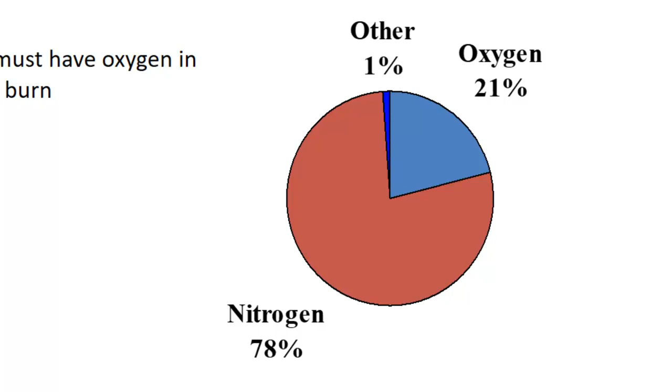First thing you need to know about burning fuel inside an engine is you need a lot of air to go with the fuel. It's really the oxygen we're after, and since oxygen only makes up about 21% of the air, we need a lot of air to go with the fuel we're trying to burn. The ideal amount of air for the fuel is 15 parts air to 1 part fuel, by weight. Air is a lot lighter than fuel, so you need a lot more air than fuel. That ratio of 15 to 1 is what we call the stoichiometric ratio.

If you have thoroughly atomized fuel and burn it at 15 to 1, then every single fuel molecule gets burned and every single oxygen molecule gets burned. In other words, it's totally efficient.

That's not where we get our best power, though. Our best power is a little bit richer than that. Not all the fuel is being burned. That ratio is 12 to 1, 12 parts air to 1 part fuel, so a little bit less air going with the fuel. And that unburned fuel can carry away a little bit of the heat for us.

The leanest we can burn the fuel in the engine is about 18 to 1. The very richest we can burn it is 8 to 1. If you try to burn it any leaner than 18 to 1 or any richer than 8 to 1, the flame gets too cold and goes out, and the engine quits.

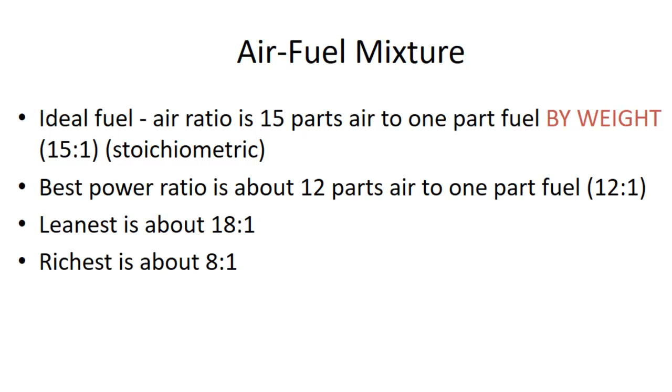So how much air is that? You really don't need to know this as a pilot, but just out of general interest: one gallon of AvGas weighs 6 pounds. A cubic foot of air weighs 0.07651 pounds, which is very, very light. So if we want to burn it at best power, 12 to 1, we have to consume almost 1,000 cubic feet of air with each gallon of fuel we burn. For a Cessna 152, for instance, that's 6,000 cubic feet per hour, or about 100 cubic feet for every minute the engine is running.

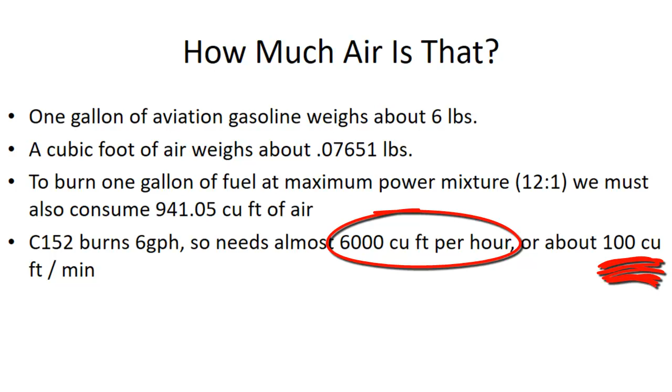Now, we don't know how much air is coming in. There's no real handy way to measure that for us. But we can get an idea of what the mixture is doing by measuring the temperature of the exhaust gases as they come out of the engine, with an exhaust gas temperature gauge, EGT. There's a probe that goes into the exhaust pipe and measures the temperature of the gases coming out. They're typically read out in hundreds of degrees Fahrenheit, and each of the little divisions is 25 degrees.

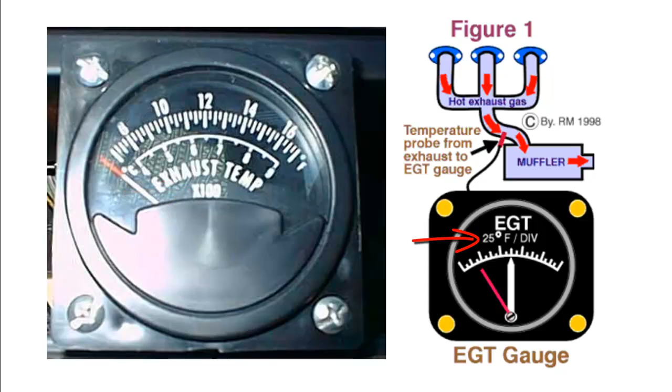Here I've got a chart that shows the relationship between exhaust gas temperature and mixture, where mixture is lean towards the right side of the graph and rich towards the left side. And I made a little cartoon EGT gauge so I can show you how to use one.

So here's about where full rich is going to be. We've gotten up there, we've leveled off in our cruise, and we want to lean the mixture out for cruise. We would only do this for airplanes. For helicopters, we don't touch the mixture control—it's just too dangerous. We'll talk about that a little bit in class.

So we're up there to cruise. We want to start leaning it out, and as we do, we see the exhaust gas temperature come up. We continue to lean until the exhaust gas temperature drops a little bit again, and then we go back to where it was highest. There's a little knob we can turn to set the skinny needle right there at the peak EGT—that's a placeholder so we know where peak is.

Then we can adjust the mixture either to the rich or to the lean side, and either way we go, the temperature is going to drop. What you'll find if you read your pilot operating handbook carefully is that the manufacturer recommends you go 25 degrees or more on the lean side of peak. Most operators, however, have found they get more life out of their engines if they go to the rich side of peak.

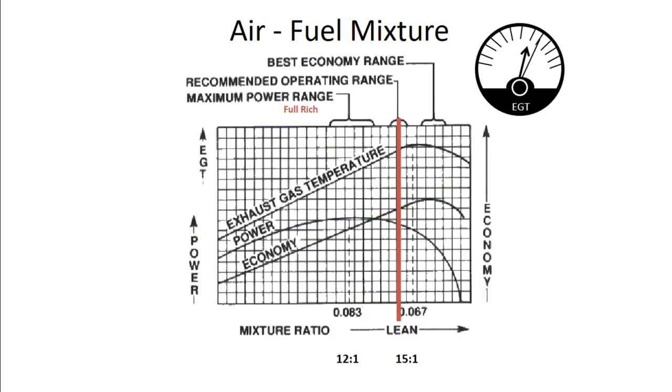Specific fuel consumption is a way of measuring the efficiency of the engine, and it is represented in the number of pounds that you have to burn in order to get each horsepower that you produce per hour. For our engine in the 152, you're looking at about half a pound per hour for each horsepower you produce. So it really doesn't vary much from one power setting to another. But since you're producing more horsepower at a higher power setting, you multiply 0.5 times a bigger number of horsepower and you get a bigger fuel consumption.

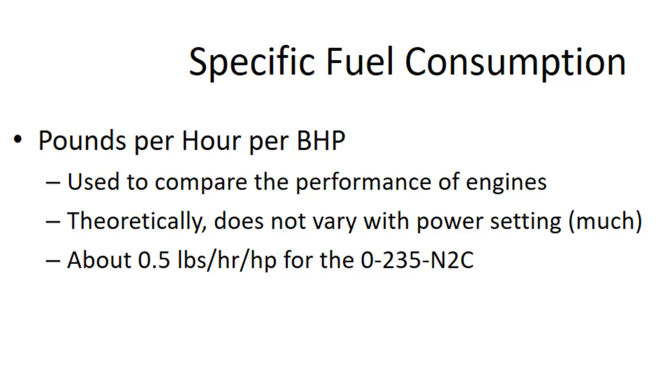Most aviation reciprocating engines are right about a half a pound per hour per horsepower. I believe that's the case for all of the engines we're using, within a tenth of a pound per hour in most cases. The only ones more efficient are diesels, and if you water cool an engine so you can run it harder, that gives you a little more efficiency. You can get the efficiency to about 0.4 pounds per hour per horsepower that way.

AvGas has a number of requirements. The first and most important is that it is approved, either in the pilot operating handbook, meaning it's listed in the type certificate and data sheets as approved for the aircraft, or you have to have a supplemental type certificate that allows you to run a different type of fuel. For instance, a lot of general aviation aircraft have a supplemental type certificate that allows them to run unleaded automotive fuel. But you have to have it approved. That's all the FAA cares about, because their view is the only way it can get approved is if it's tested thoroughly. You could have the best racing fuel ever designed, but it can't go in the airplane or helicopter unless it is approved by the FAA.

It also has to have a low freezing point. We don't want to get up to altitude where it's really cold and have it freeze up in our tanks. It also needs a high boiling point, because the pressure is very low at higher altitudes, and that lowers the boiling point, so the fuel could burst into a boil in the lines going up into the engine compartment. We call that vapor lock. So we need something resistant to that.

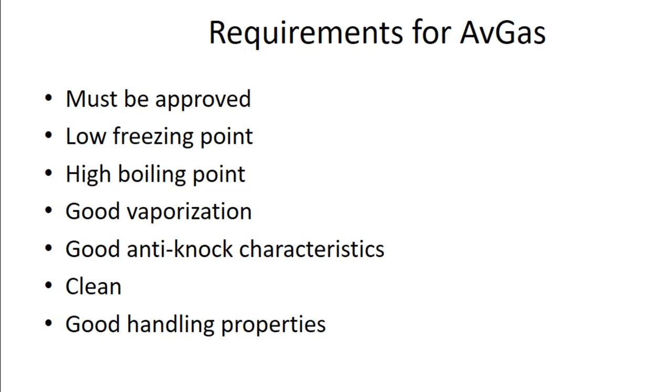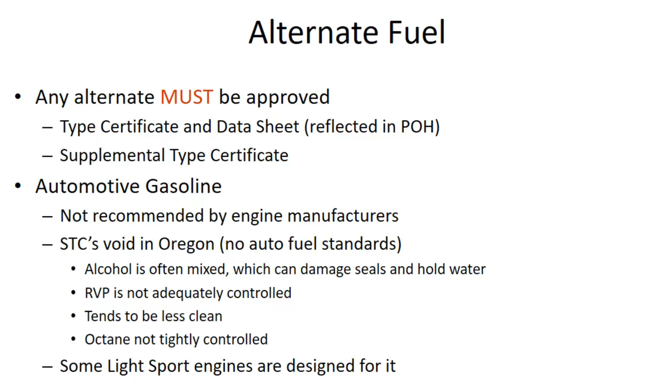Now, alternative fuels again still have to be approved, so you need a supplemental type certificate for that. On the issue of automotive gasoline, I have had some bad experiences, which I'll talk about in class with you. You need to be aware that the supplemental type certificates require certain standards that have to be met, and not all autogas meets those standards. Oregon has no regulations that govern the quality of automotive fuel here, so if you're going to use it, you have to be very careful where it came from and get the fuel jobber to verify that it conforms to the supplemental type certificate's standards. It's an ASTM standard that they have to conform to.

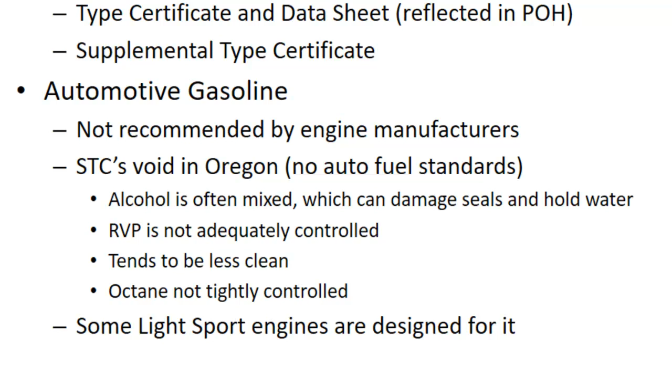There are some light sport engines that are designed for unleaded automotive fuel, and so if it's listed in the Pilot Operating Handbook as being approved, then you can do it.

A word about vapor pressure. This is an important and often overlooked characteristic of the fuel, and it's measured in something we call Reid vapor pressure, which indicates the amount of atmospheric pressure needed in order to hold the fuel in a liquid state.

If the vapor pressure is too low, that means you have to have very low pressure in order to vaporize it, and then it won't vaporize properly, and you'll end up with big clumps of fuel going up into the engine, and that doesn't burn very well.

If the RVP is too high, then it bursts into vapor too easily, and you could have it do that in a fuel line as it goes into the engine compartment, and then you get vapor lock. That bubble of vaporized fuel blocks any more fuel from going to the engine, and you starve your engine of fuel.

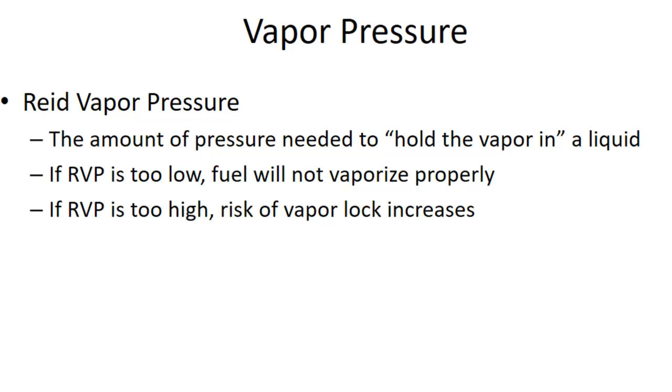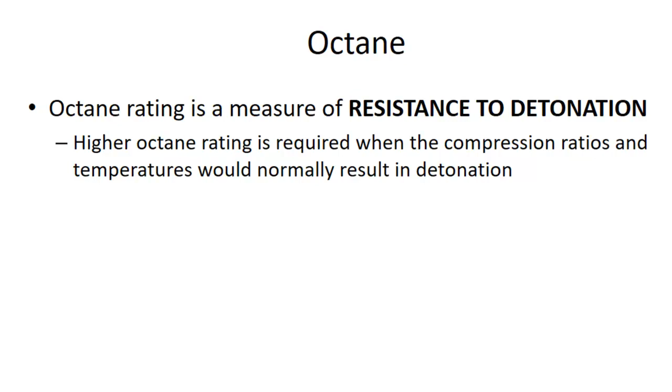Octane is a measure of the resistance to detonation for the fuel. So how much temperature and pressure can we put it under without it detonating?

If you don't have a detonation problem, then higher octane fuel really doesn't do anything for you. So if you've got a car that runs fine on regular, there's really nothing to be gained by putting premium in it. On the other hand, if you have a car and you hear it knock from time to time, getting some pinging, then a higher octane fuel will oftentimes solve that problem.

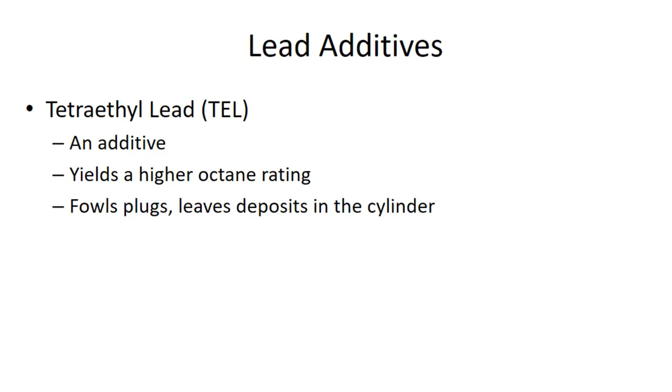The way we get high octane in aviation gasoline is with lead additives. In particular, it's tetraethyl lead, the chemical we use. It's a liquid additive that gets put into the fuel, and it yields a higher anti-knock rating, a higher octane rating. It also fouls spark plugs and shorts them out, making the engine not run smooth, leaves deposits in the cylinder that can cause pre-detonation, and it also poisons the earth. There's really nothing good about it except that it gives us a higher octane rating.

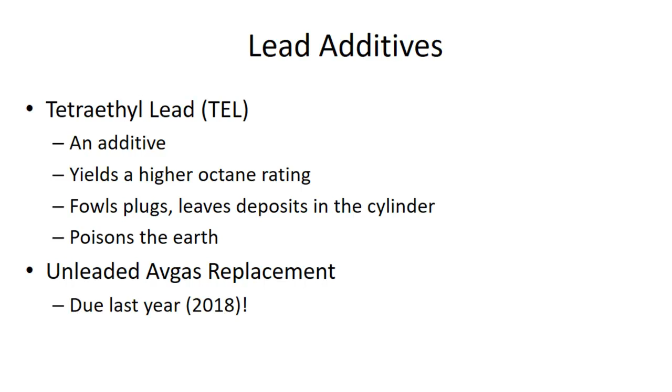Unleaded AvGas is supposed to be coming here, and in fact it's supposed to be here already. It was due last year. However, there were some issues, in quotes. We don't know what those issues are, but the FAA did a bunch of testing on the unleaded AvGas replacements, and there were some issues that needed to be ironed out with them. It'll be interesting to see how long that takes.

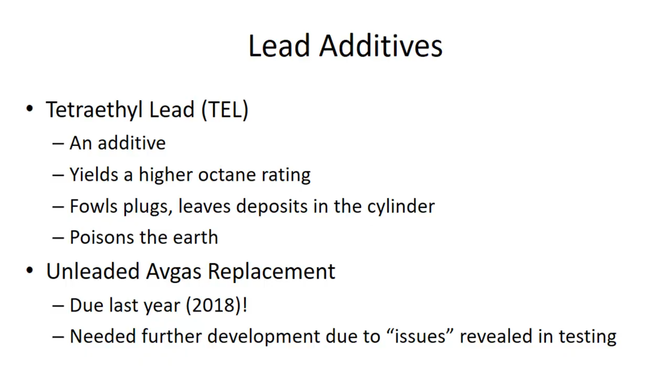Now, AvGas has historically come in about 4 flavors: 80, 100 low lead, 100, and 115. Just out of historical interest, they actually used to be called with 2 numbers. So 80 used to be 80/87. There used to be 100, which used to be 100/130. And then the 115 used to be 115/145. The 2 numbers referred to the anti-knock characteristics at a lean setting versus a rich setting.

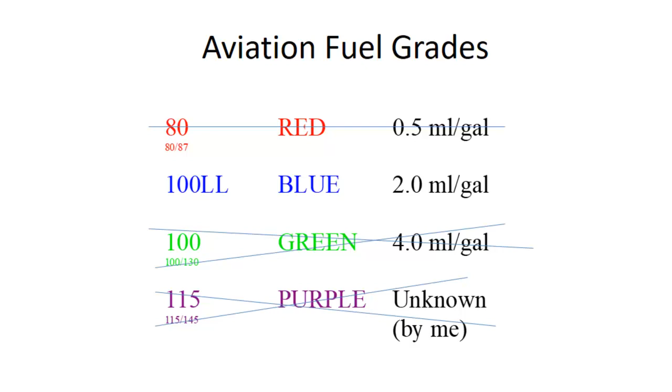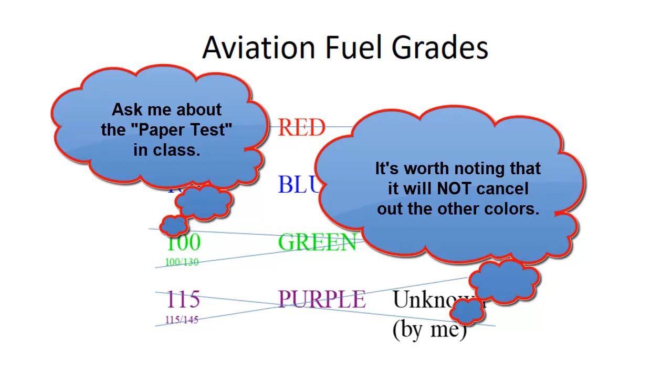If you do run into some red, just know that you can't use that in your 152 or your 172 or your R22. You need a little bit better octane than that.

Fuel contamination - there are a number of types of fuel contamination. We're going to go through those real quick here.

The most obvious is solids, which can build up in the tank over years, but can also be introduced during fueling operations. So we're gonna talk about that quite a bit in class, and we're probably gonna go out and take a look at the pumps and maybe even pump a little fuel into an airplane, because the caution you use during the fueling process is very important.

Any solids that do get into the fuel system have to be removed by whatever filters you have in place in the aircraft.

Surfactants are partially soluble things that get gooey when they're in the fuel tank. The best example of this would be the sealant they use to seal up certain fuel tanks. When it's exposed to something like alcohol, sometimes they will partially dissolve.

Water is a contaminant. It is fortunately heavy and so tends to precipitate out into the bottom of the tank, and that's where we sample it - we keep sampling until we don't have any more water.

A couple of little tricks that it can play on you here. First of all, if it's AvGas, it does drop out of AvGas fairly quickly. If it's Jet A and it's cold, the water can be held in suspension for a long time and then slowly precipitate out. So you have to be a little bit careful of that.

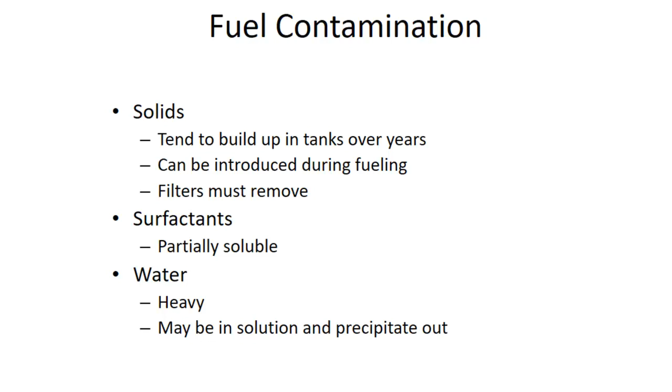And then during the flight, if it warms up, now you've got water in your fuel and you could have a problem.

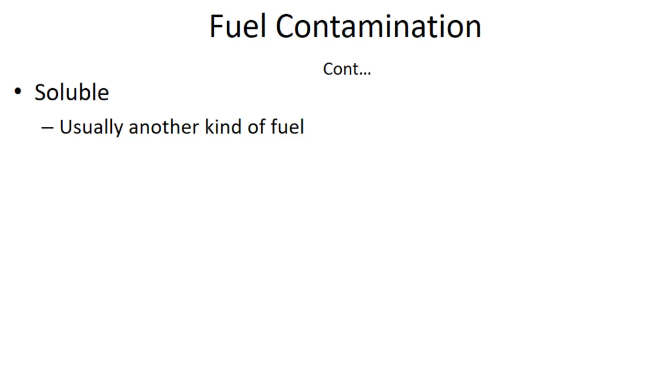Soluble fuel contaminants is another possibility and probably one of the most common. The most common soluble fuel contamination is the wrong kind of fuel - for instance, putting Jet A into a tank that's really only supposed to hold AvGas, which will make the engine fail. So you have to be super careful about that.

Microorganisms are essentially algae organisms suspended in the fuel, and if the fuel sits in a fuel tank and water gets into the tank with it, they will jump into life. They'll start multiplying, and the nasty thing about them is it breaks the surface tension of the water and makes it stick to the inside of the tanks, making it harder to come out.

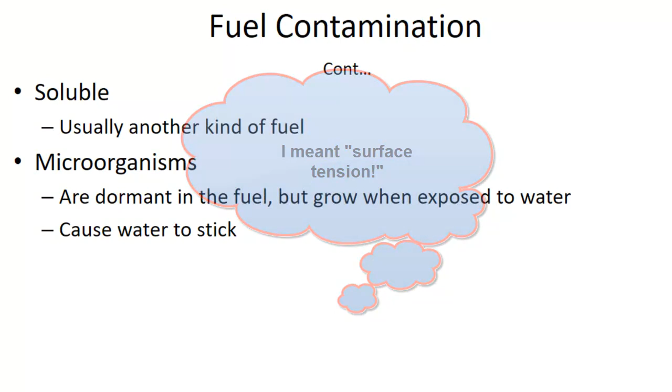It's pink, so if you get a sample of fuel with a little water at the bottom and the water is pink, that's microorganisms that grow in the fuel. You have to be extra careful when that happens to make sure you slosh the tank and try to get all the water out.

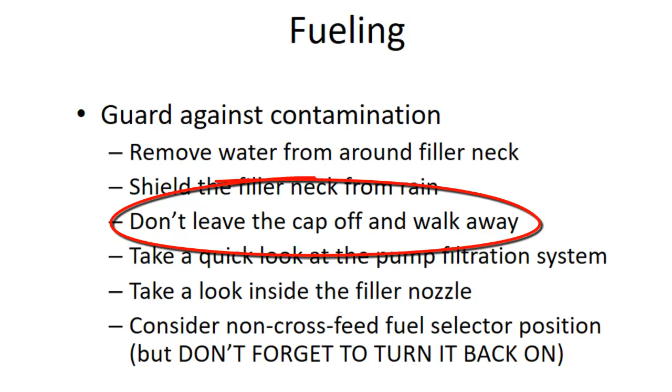Some things to keep in mind when fueling: first, guard against contamination. Remove water from around the filler neck, especially if the filler neck is recessed in the wing. Shield the filler neck from rain if it's raining really hard. Never leave the cap off and walk away, because contamination can get in there while your back is turned. Also, you may forget about the cap.

So even if I'm stepping down off the ladder for just a second to reset the pump or something like that, I put the cap back on, then I just take it off again when I get back up there.

Take a quick look at the pump filtration system. If you're at a remote location, stopping at an FBO you've never been at before, make sure it's well maintained and doesn't look like the filters haven't been changed in 30 years. Also take a look inside the filler nozzle before you start pumping, and make sure it's not filled with dirt.

Consider the non-cross-feed fuel selector position. This has nothing to do with contamination, but it does affect getting the most out of your fill. If you have something like a 172 with the fuel selector in the both position, the fuel can cross-feed. So you fuel up one side, and while you're moving the ladder over to fuel the other side, some fuel runs into the second tank. Then you fill that tank up and fuel runs back, so you've shorted yourself a couple of gallons — and that could be the gallons that would have gotten you to your destination.

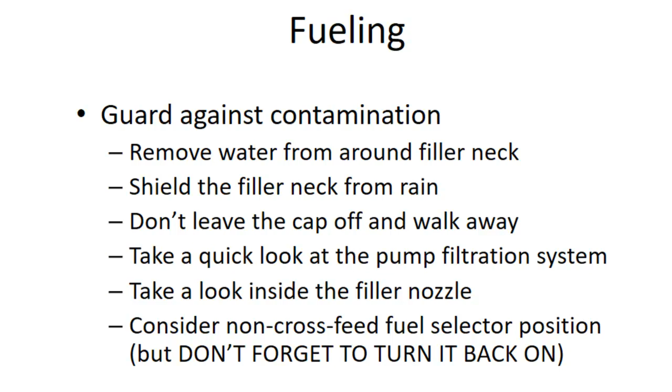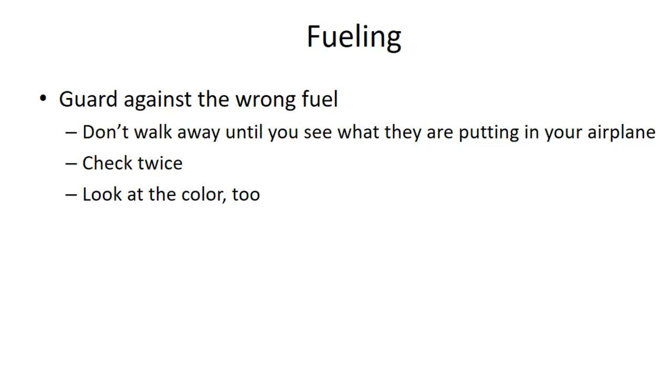Guard against the wrong kind of fuel. Be really paranoid about this, and don't let other people put fuel in your aircraft unless they look like a professional. Take a look at what the pump says you're getting fuel out of — if it isn't labeled in any way, be highly skeptical. I've been sold fuel before that the FBO claimed was 80-87 octane avgas that turned out to be jet fuel. So really watch for it.

Guard against static. There's a ground wire you have to connect — we'll show you how in class. You pull it off a spool and clip it typically to the exhaust pipe or a bare metal nut or bolt someplace handy. That keeps sparks from happening right at the fuel nozzle while you're fueling the aircraft. Also, while fuel is flowing, it can create static electricity as it moves through the hose, so I keep the nozzle against the side of the filler neck — that way there can't be a spark.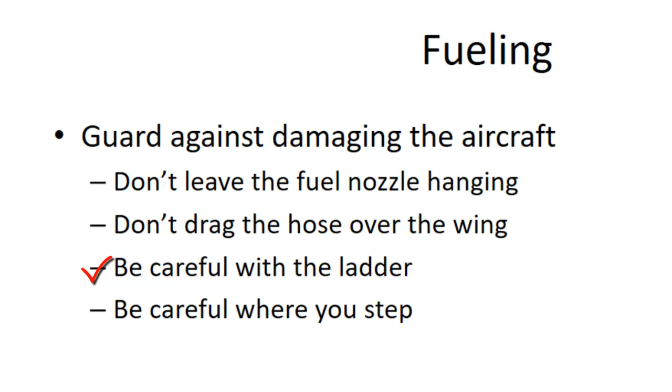Don't drag the hose over the wing. I usually toss it up over my shoulder so it won't touch the wing. Be really careful with the ladder so it doesn't blow into the aircraft, and be careful where you step so you don't step on something fragile. Also be careful where you step in regards to injury.

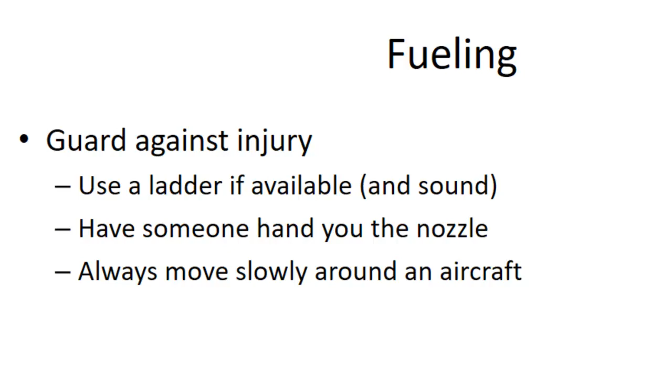It's really easy to end up falling down when you're fueling an aircraft, and we'll talk more about that in class. But be prepared to have somebody give you a hand with things if you need to, and take your time — don't be in a rush when you're doing this.

If you're at a remote location without fuel pumps and you're filling out of cans, Jeep cans, make sure the fuel cans you're using are dedicated to avgas. Avgas can be filtered as you put it in. Something they don't put in the books anymore, but used to be something you actually had to know to be a pilot: a chamois — a real one, not an imitation, but an actual chamois skin — works really well if you're using a funnel to fuel the airplane out of a can.

You can put the chamois in the funnel. The fuel will pass through it fairly quickly, but it's a very fine filter, so dirt gets filtered out. It also has the characteristic of picking up water — as water droplets go through, the chamois will grab the water but let the fuel pass.

That's it. We'll go over some pointers on actually putting fuel into airplanes when we get into the classroom.